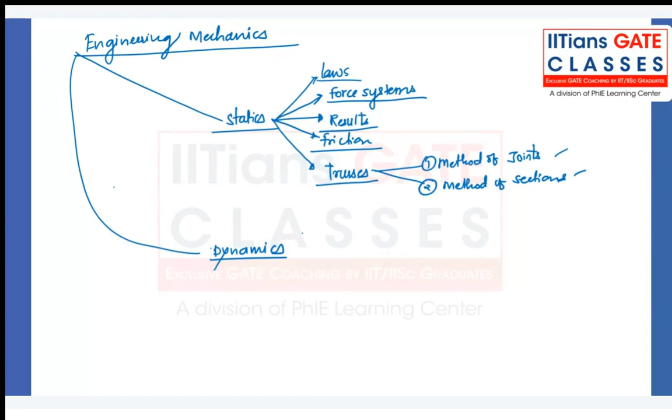Basically, if a truss is smaller, a single truss or two trusses, then maybe we can go for joints. But if a larger truss structure is there, and they are asking for a force in a member which is, let's say, at the center of it, then if we use the method of joints it will be time consuming. So in that case, we can go for the method of sections.

And the last topic which we studied in statics was the principle of virtual work. We studied it at the end, but it is mainly related to the statics part because the body is in equilibrium and we assume a virtual displacement, and the work done by the virtual displacement we called virtual work. And the principle of virtual work states that the sum of all the virtual work is zero for any virtual displacement, assuming we have calculated the forces and moments.

But you already know that we can do the same by equations of equilibrium as well. We don't need the virtual work principle exclusively, so it's not a compulsory topic. And that's all we studied in the statics part, and we have solved problems on each and every topic.

In dynamics, as you know, I gave initially a brief introduction about Newton's laws - the first law, second law, and third law. Also how the equations of motion will look like, and how we can derive them.

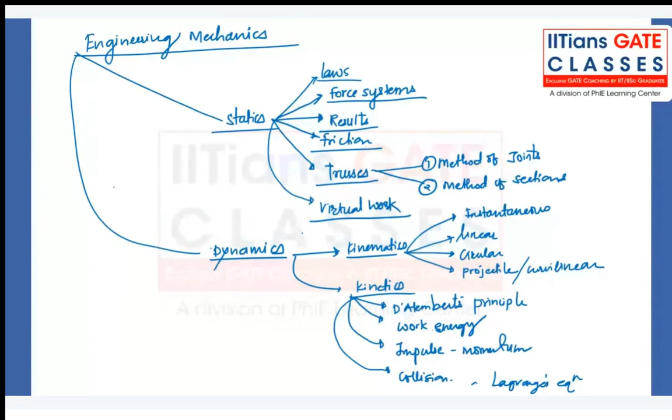I have also given you an introduction to the polar form when we studied kinematics. We also solved problems not just in linear but also in the polar coordinate system, and the same equations we use here apply in the polar form. We solved some problems in that coordinate system as well.

Keep revising the subject regularly after a few months, since you have a huge gap of close to 10-11 months before the exam. You should revise it regularly, maybe after 3-4 months, just to stay in touch with the subject.

Continue solving questions. What I'll do is I have collected some questions which we'll solve today, and I'll also send you some questions regularly through the WhatsApp group. That's the process we will follow.

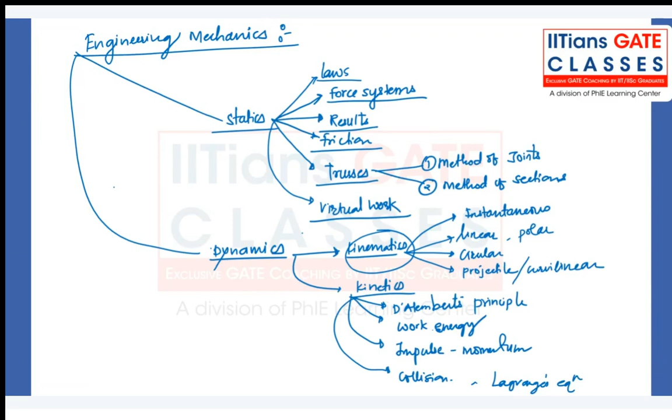So let's start with some questions. I have brought some questions from the statics part, because it's been a while since we studied statics, and we have studied dynamics questions comparatively a lot. So it would make more sense to focus first on the statics questions.

Okay, I'll expect quick answers here, since you are already aware of this topic. Little bit tricky questions I am putting. At least 2 to 3 questions will be tricky. So let's start with them.

What I want is you should be able to draw the free body diagrams correctly. If you are able to do it, then the problem is very easy. Compute the force F.

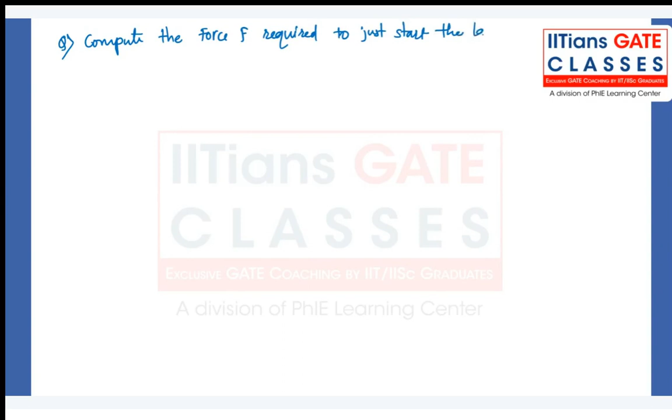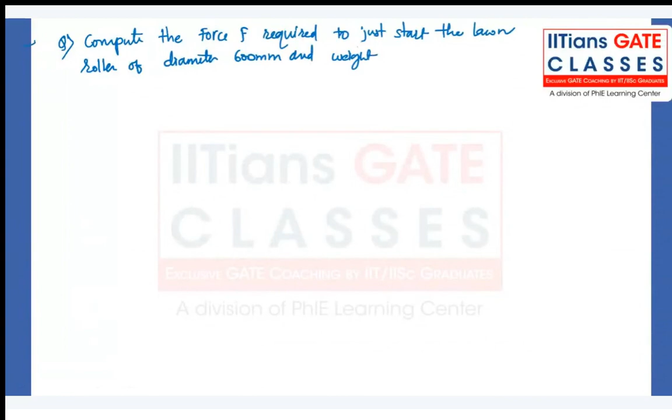Required to just start the lawn roller of diameter 600 mm and weight is equal to 1 kilonewton over a 75 millimeter step, when the roller is pushed as shown in figure. So this is the first part of the question.

Second part of the question is the magnitude and direction of reaction of the step on the roller. Okay, so quite interesting question.

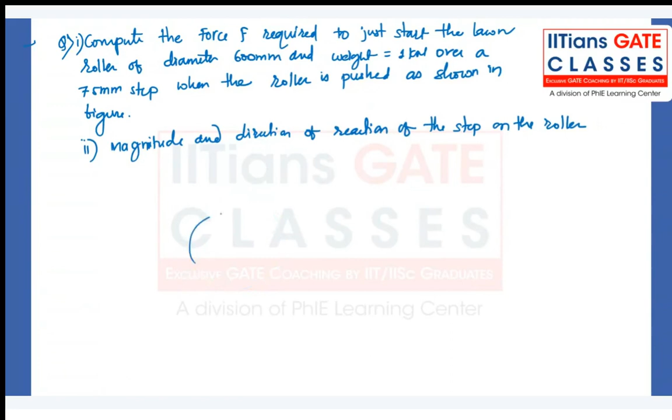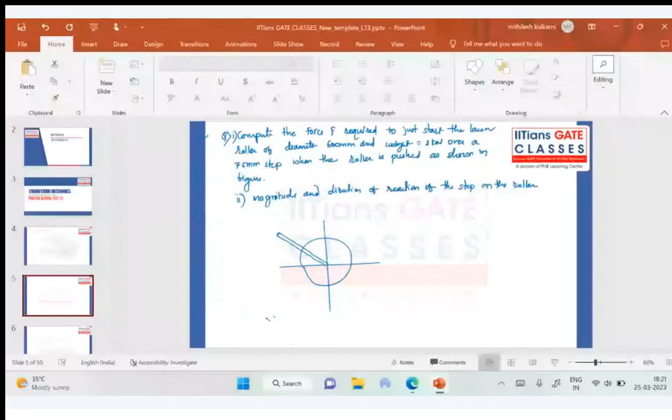Assume this as the roller. This is the handle of the roller. We are applying a force F, which is at 30 degree with the horizontal, and the diameter is 600 mm. The radius is 300 mm. So total diameter is 600 mm. And it is on the step.

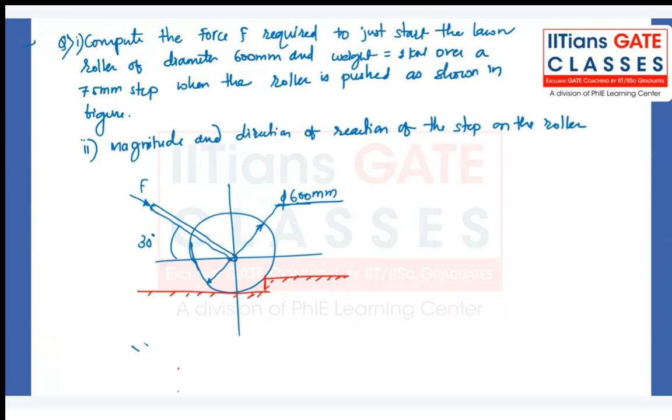So the step is 75 mm. 75 mm step. And we don't know at certain angle, let's say it is connected here.

So yeah, I think other things you should be able to do it. I'll not give more hints here. That is all given in the question. Weight of the block is W, that is 1 kilonewton. Weight of the roller, sorry. You can call this point as A, and you can call this point as B.

So I'll give you 2 minutes of time, and you come back with your answers. Though it looks complicated, it is not that complicated. If you think it correctly with the approach of solving using the equations of equilibrium, you should be able to solve it easily.

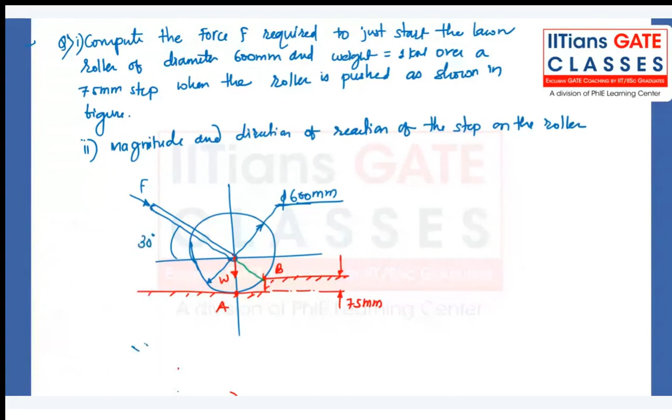So if you think this height is 225, since the total height of the center from ground is 300 minus, we have to subtract the 75 from it to get this 225 mm. So we know this height, we know the radius of the roller, so you can calculate the alpha angle. What is sine of alpha? So let's call this point as D. Sine of alpha is equal to BD by BC, where C is the center. So it is 225 divided by 300.

No, Abhishek, 6 Newton looks very less, it's not correct. So you will get around 0.75. So alpha is sine inverse of 0.75, and that is 48.59 degrees. Okay, so this is the alpha angle.

So if I draw now the free body diagram of that joint at point B, look at it, how it will look like. We have the point B like this, and at point B, what are the things? We have certain force F. Oh no, this is not point B, we'll start at point C first, and then we'll come to point B if required. So at point C, we have the force which is acting at an angle 30 degree. We have self weight of the roller, which is W, that is 1 kilonewton. Let's call it F, and then

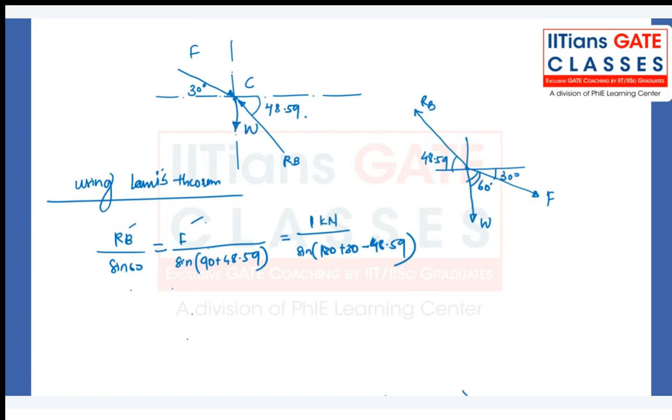Think on it. What is unknown here? We either have to calculate RB or F, or W is known. So W is how much? 1 kilonewton. So yeah, then you don't need anything else. By using this relation, you can also calculate F and RB.

How will F look like? F will be equal to 1 into sine of 90 plus 48.59 divided by sine of 180 degree plus 30, or let's calculate it. You should get 210 minus 48.59. Calculate using calci, should get 2.075 kilonewton.

And what about the RB? It is 1 into sine of 60 divided by sine of 210 minus 48.59. So it's 0.866 divided by 0.319, close to 2.72 kilonewton.

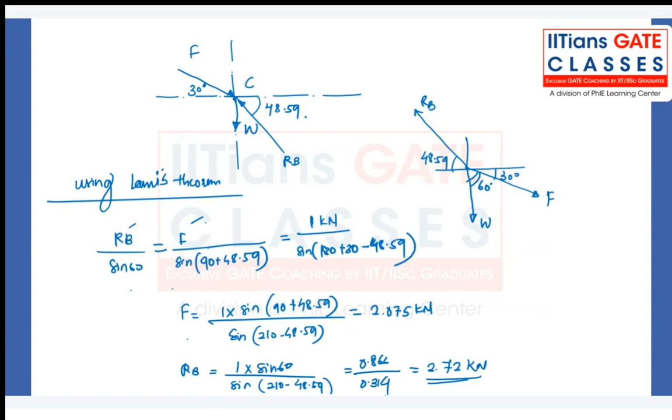Is it clear, Abhishek? Are you following? Any doubt? Because none of you has answered this question. It's not that difficult. You should be able to at least draw this free body diagram, and then I'm doing nothing here, just applying Lami's theorem to solve it. If you don't want to use Lami's theorem, you can also use the equations of equilibrium and solve it. Are you following? Any doubt?

See, don't just get afraid if a question comes like this, and not in the form of a force system. It is actually indirectly given in the form of a force system. So you should apply your basic understanding to check how can I convert this problem to the force system.

Yes, Ganesh, I'll explain you once again. Okay, let's...

So if you are taking moments about B, then actually it is becoming very difficult to solve, Abhishek, because you don't know the perpendicular distance between the line of action of the force F and the point B, and it's difficult to calculate, right?

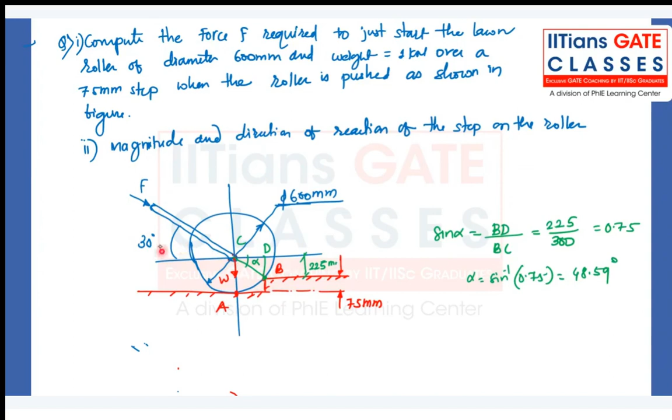And that is not along the line of action of the 30-degree force. So the 30-degree force, Abhishek, will create a moment, but you have to again draw the line of action and calculate the perpendicular distance, and make the calculation, which is time consuming. But if you know the angle, if you know the reaction, the best way is to know that you have a force or reaction at angle 48.59 passing through the origin or the center, and we already have two forces which are passing through center.

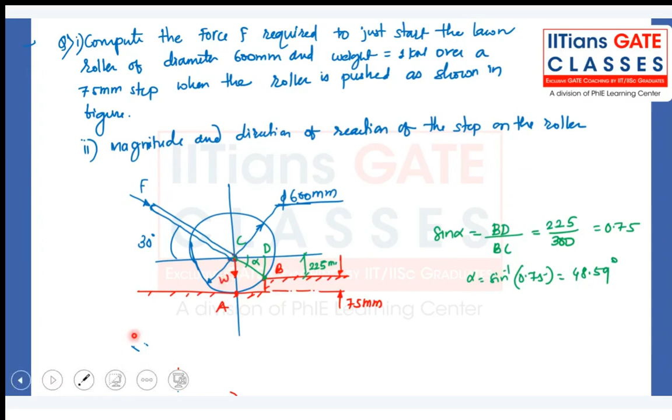So the force system will look something like this. One force which is applied by the user on the roller. The weight is the weight of the roller, and RB is a reaction by the step.

I have redrawn this figure by using the principle of transmissibility of force. So RB I can draw from here, F I can draw from here, and W as it is. Now I use Lami's theorem to solve it. RB we have calculated, that is the reaction because of the step, and F also we have calculated, that is the force we have to apply in order to start moving this roller. Ganesh, is it clear?

Okay, problems are simple. Just you have to convert it into a free body diagram correctly. I'll give one more question, little bit tricky again. I would expect you should be able to deal with this question easily.

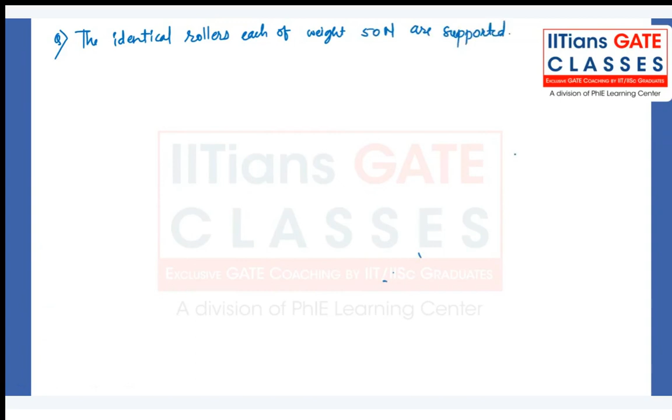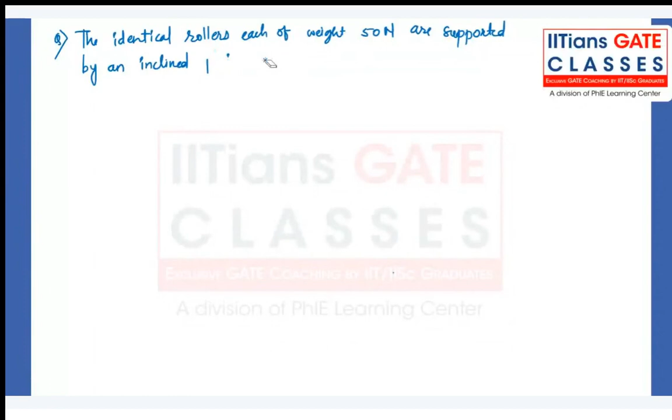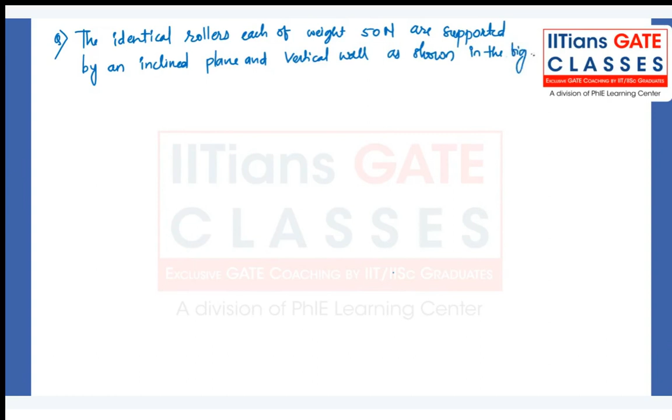The identical rollers, each of 50 Newton, are supported by an inclined plane and a vertical wall, as shown in the figure. Find the reactions at the points of support A, B and C. Assume all surfaces to be smooth, so you don't consider friction here.

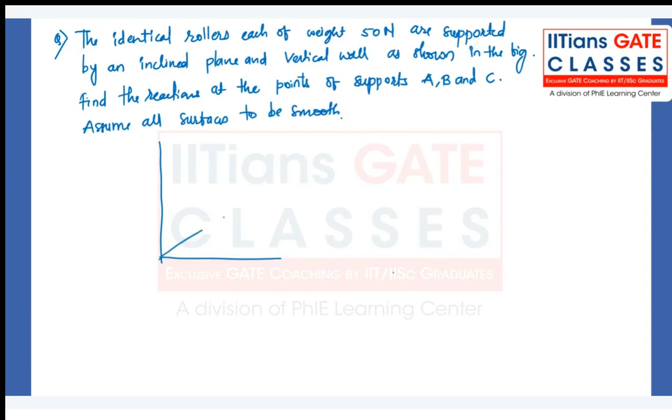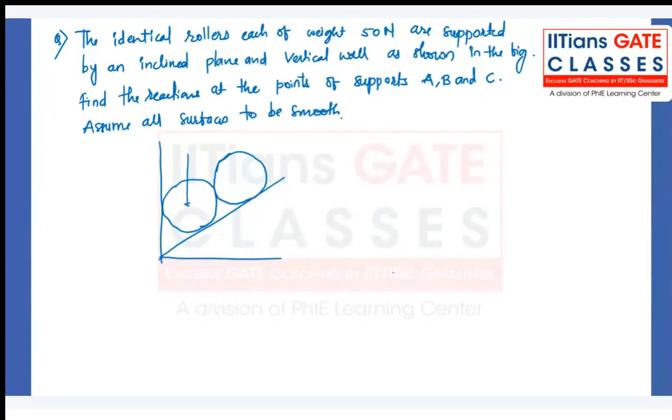Let me draw the diagram. Two rollers are there of weight 50 Newton, identical rollers, supported by a vertical wall and an inclined plane. This is the vertical wall, and this is the inclined plane. This is point B, this is point A, and this is point C. This angle of inclination is 30 degrees. So solve this question, you can take this point as point D.

Solve this question. First of all, think how the force system will look like. Try to solve it in a smart way. Draw the free body diagrams, and then calculate these reactions at support A, B, and C. I'll wait for 2-3 more minutes, and you solve this question.

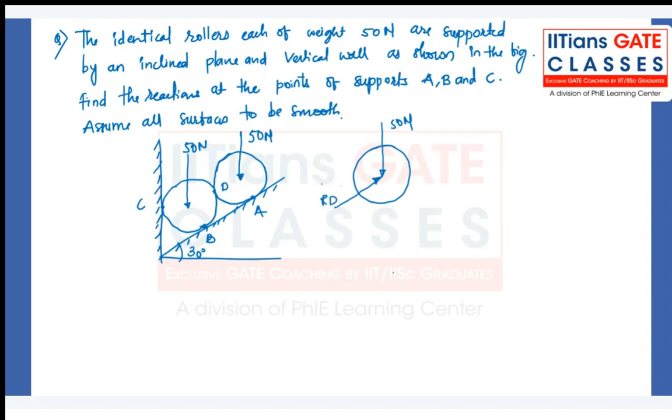So let's start with the free body diagrams of the rollers. First roller looks like this, we have a 50 Newton force acting like this. Then we have the second roller. Because we have less forces here, we'll start with the second roller. We have A and RD only, RD and RA.

You have to find the angles, that is the main point here. If the angle between two lines is 30 degrees, then the angle between their perpendiculars also has to be 30 degrees. So considering that this angle has to be 30 degrees, this has to be 60 degrees. Similarly, these two lines should also create a 30-degree angle with horizontal, so RD should make a 30-degree angle with horizontal, so this angle has to be 60 degrees. And here we have 90 degrees, and here we have 90 degrees.

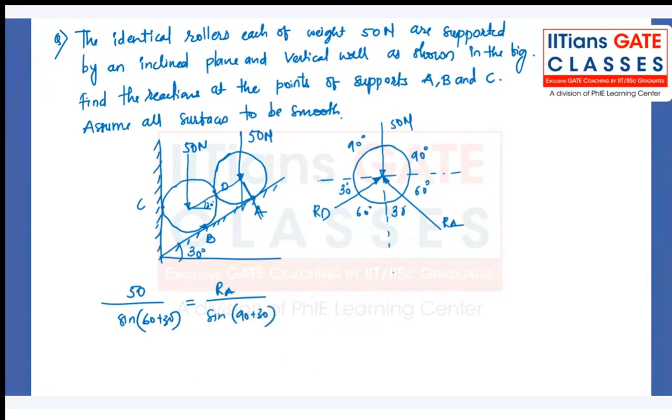So this is RD and this is RA. Now if I use Lami's theorem here: 50 divided by sine of 90, because sine 60 plus 30 is 90 and sine 90 is 1, that is equal to RA divided by sine of 90 plus 30. Sine 90 degree plus theta is cos of theta, or sine 120 you can directly calculate using calculator. That is equal to RD divided by sine of 90 plus 60 degree.

So from this you can easily calculate RA and RD. This is 1 anyway, so it is very easy to calculate RA. RA is equal to 50 sine of 120, so it is 50 into 0.866, so it is 43.3 Newton. Abhishek, yes, RA is correct. Ganesh, so RC is not equal to 43, so check your answer.

What about RD? RD also you can calculate. RD is equal to 50 into sine of 150, and that is 0.5. Sine 90 degree plus theta is cos theta, and cos 60 is 1 by 2. You can say 25 Newton.

So we got RA from here. But RB and RC, if you want to calculate, you just have to create one more free body diagram for the first roller. From this, what we have calculated is RD, and that will help us there. So you can either draw the free body diagram of the whole system, or you can also draw the free body diagram of the structure.

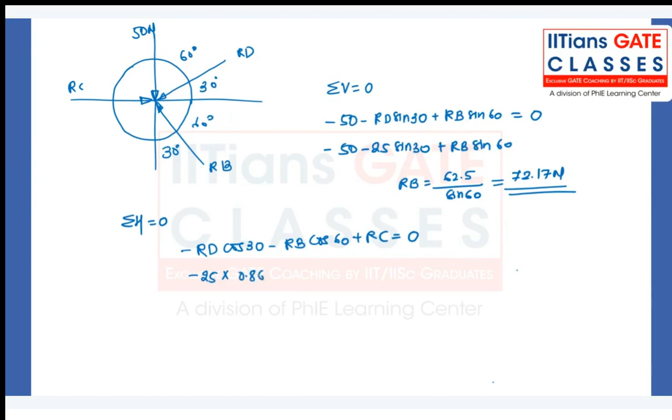RD is 25, minus 25 into cos 30 is 0.866, minus RB which we just calculated 72.17 into 0.5, plus RC equal to 0. So from this you can calculate RC, which is 57.735 Newton.

Abhishek, yes. RC and RB, you understood. Srijana, looks like some, Sonu, you guys have answered it incorrectly. Now is it clear to you all?

Once the main problem, 80% of the problem is solved once you are able to draw the free-body diagram. After that, there is nothing, it is just mathematics. I'm not doing anything after drawing the free-body diagram. It is just summation of all the forces in horizontal direction, vertical direction equal to 0. And in this case, I applied Lami's theorem, that is the same thing, nothing different.

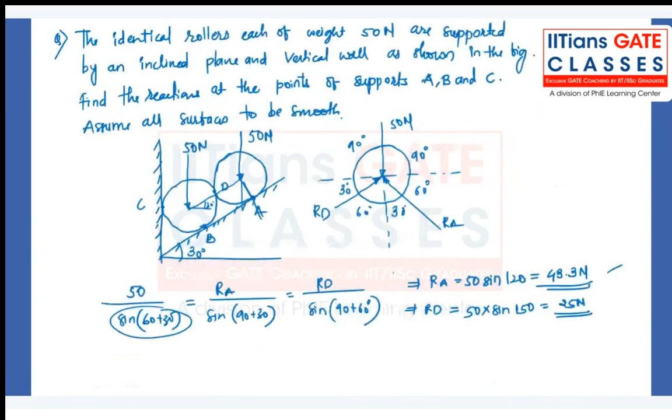One more interesting question I'll give. These are good questions to build your thinking on creating free body diagrams, because statics problems can be solved if you are able to draw the free body diagram. So you should think of a variety of problems. You should be able to easily tell at what angle RD and RA will come here, at what angle RB and RD will come. Just by looking into the figure, you should be able to directly draw it and solve it easily. It comes with solving problems, otherwise it will take some time, and ultimately you will be able to solve it, but it will take time. Keep practicing.

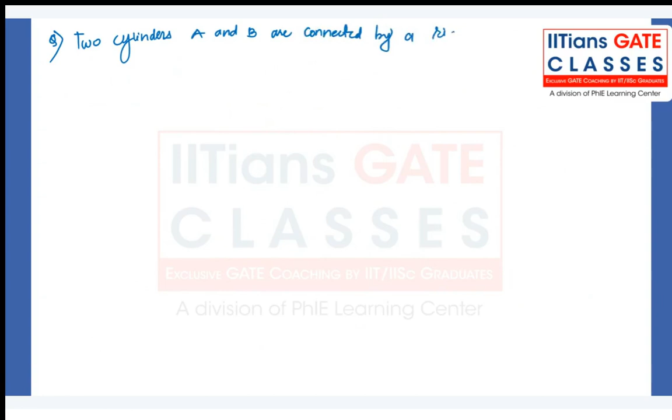Let's take one more question. Two cylinders, A and B, again an interesting question, are connected by a rigid bar of negligible weight, hinged at each cylinder, as shown in the figure. Determine the magnitude of force P required to keep the system in equilibrium. That is the only question.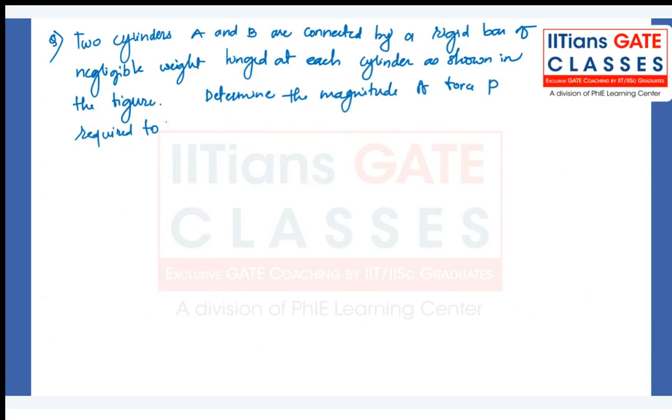Determine the magnitude of force P required to keep the system in equilibrium. These days a lot of questions are coming without options.

If you don't have practice solving problems, there is a chance you can make a silly mistake. If you have options and you are unable to achieve any of the four, you know you are doing something wrong. But if they give a question where you have to type the answer, there is no way to trace your mistake. If you make a small mistake, it can affect it. So I would suggest you focus more on practice now, so that as you solve more questions, your tendency to make mistakes will reduce and accuracy will increase. That is the main thing.

So we have two cylinders. One cylinder is kept on a 60-degree inclined plane, and another cylinder is kept somewhere here.

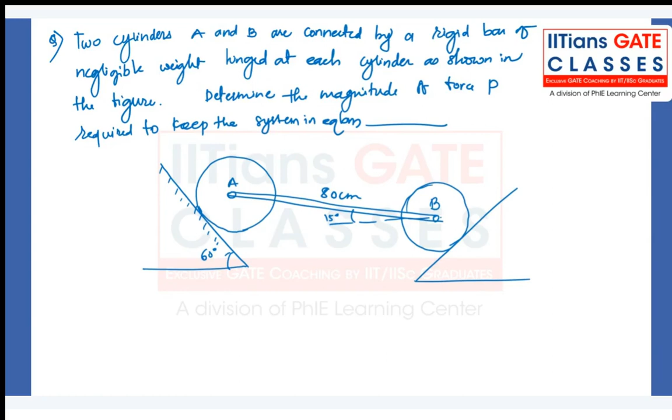So I'll show you how force P looks. Force P is making an angle of 70 degrees with the vertical. This is already given in the question. You have to calculate the magnitude of force P.

WA is the weight of the cylinders A and B. WA is 600 Newton. WB is 400 Newton. Angle is 15 degrees - this angle is 15 degrees, and this is 70 degrees here. Here this angle is 45. That is why the difference of 15 is coming.

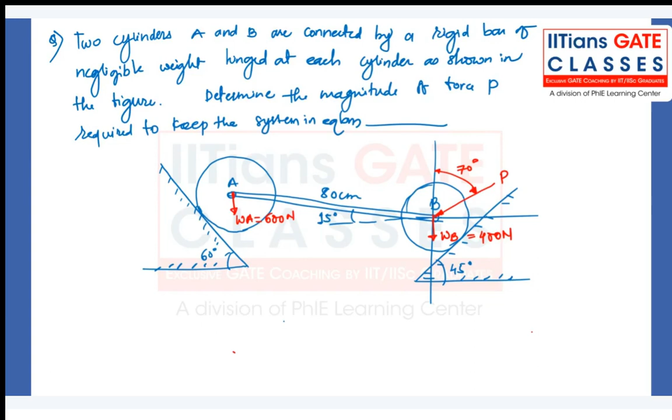I hope it is clear. More or less I have already given you all the things, so you should be able to solve it now. I'll wait for a couple of minutes. You solve it and send me the answer.

So these questions are not traditional exam questions, but they are very good questions. It will build your understanding of drawing the free body diagram. Some of them are from previous years, but not all of them. If you are able to solve this, it means you are good at drawing the free body diagram, and if a question like this comes, you should be able to handle it. You will get easier questions than this, but this will bring knowledge to you.

Yes, whenever we are supporting, obviously the reaction will come because weight is acting on that inclined surface at 60 degrees and 45 degrees. Obviously some reaction will come out of there, so you have to consider the reactions from the support.

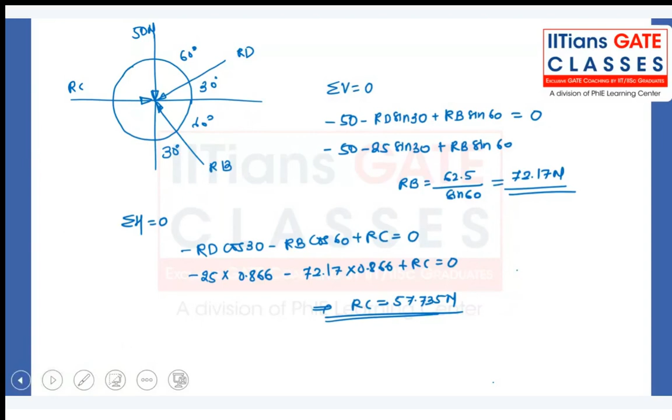Okay, let's solve it. First of all, draw the free body diagram of this left hand side cylinder, which is at an angle of 60 degrees. You can parallelly solve if you are already solving it, and share your answers in the chat group.

So we have one force which is at an angle of 60 degrees, because the angle between the perpendiculars has to be equal to the angle between the two lines, which is 60, so the perpendicular has to be 60. And we have an FBA, let's call it FAB, and that is at 15 degrees here. So this has to be 75 degrees. I hope this free body diagram is clear to everyone.

This you can call as RA. So RA divided by sine of 105 is equal to W divided by sine of 60 plus 75, that is equal to FAB divided by sine of 120. So this will give you the FAB value, because W you know, that is 600.

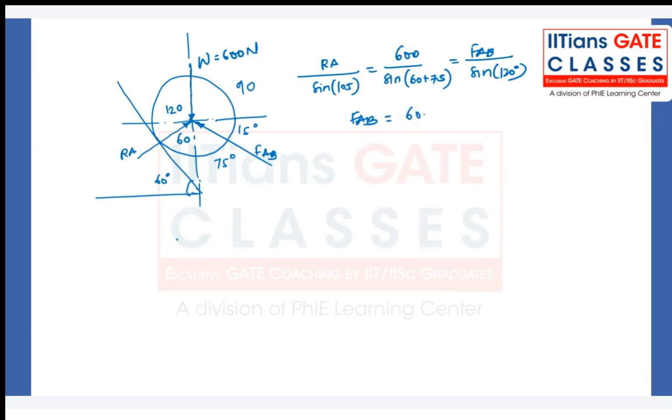I'll directly write here 600 Newton. FAB will be equal to 600 sine 120 divided by sine of 135, and that will be 734.85 Newton. We are not interested in RA and all, because we need FBA - if you draw the free body diagram of the second roller, you need FBA there. That is the only reason I calculated FBA, so I will not waste time calculating RA here.

So we have a 45-degree angle, we have the RB. This is also 45. P is acting at 70 degrees, so this is 30 degrees. Weight is acting in the downward direction, W. Calculate here, because we cannot apply it - let's do it here only, to make it easier. W is equal to 400 Newton.

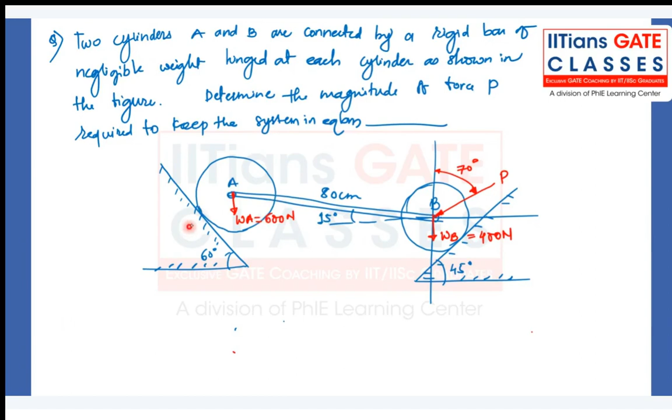So in order to remove one unknown, you first draw the free body diagram of this roller A, and then calculate FBA, because here the only unknowns are FBA and RA. Here also you can create two equations, or by using Lamy's theorem you can easily get FBA. If you don't want to use that, using summation of horizontal forces and vertical forces equal to 0 is also correct; you will get FBA using that logic as well. So now you know FBA.

Now the unknowns are only two, that is P and RB, and we have two equations coming from summation of horizontal forces equal to 0 and summation of all vertical forces equal to 0. Using these two equations you will get the value of P. Is it clear, Surjana? Yeah, okay.

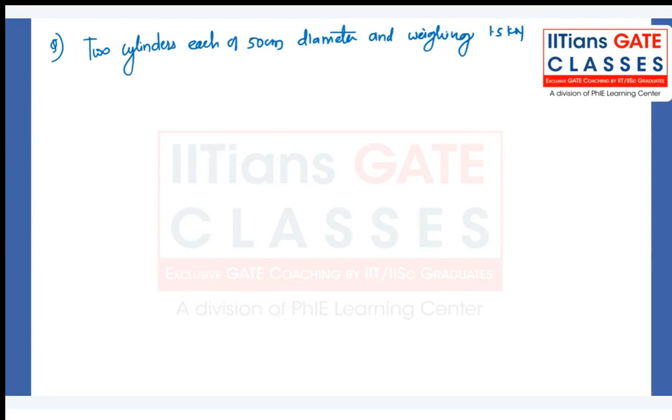Two cylinders, each of 50 centimeter diameter and weighing 1.5 kilonewton, rest on a smooth horizontal surface. They are connected by a wire rope at their centers, of length 60 centimeter. A third cylinder of 80 centimeter diameter, weighing 2 kilonewton, rests on the lower cylinders. Find the tension in the wire and the pressure, or reaction, between the contacting surfaces in kilonewton. The answer should be in kilonewton for both, one is tension and one is pressure.

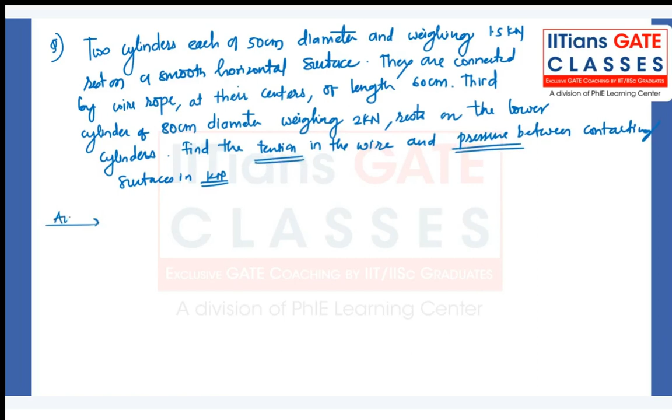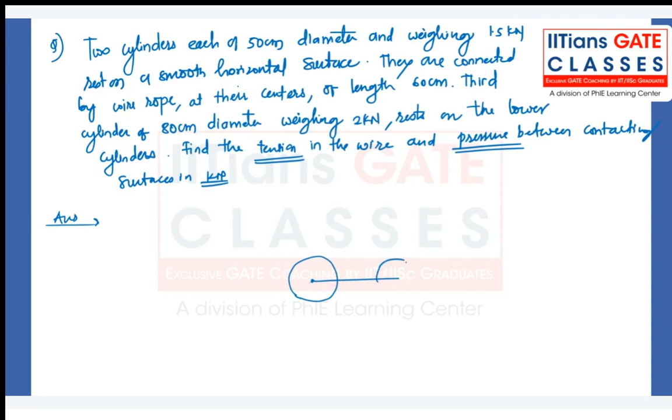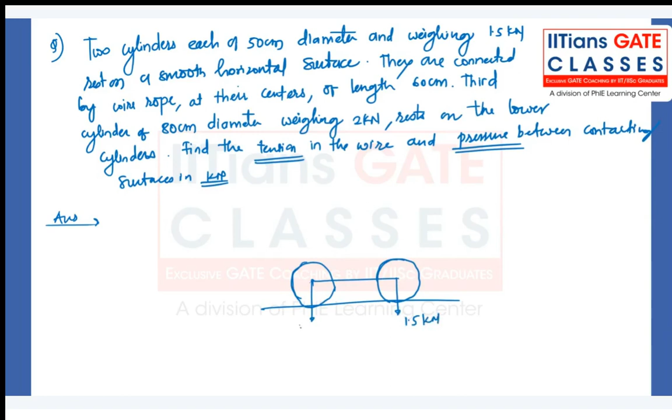Let me help you out with the diagram. So two cylinders, these are the two identical cylinders of 50 centimeter diameter, and weight is 1.5 kilonewton. Then we have this big roller, of 80 centimeter diameter, and weight is 2 kilonewton, and they are connected by using wires, this is 60 centimeter. Okay, I hope it is clear now.

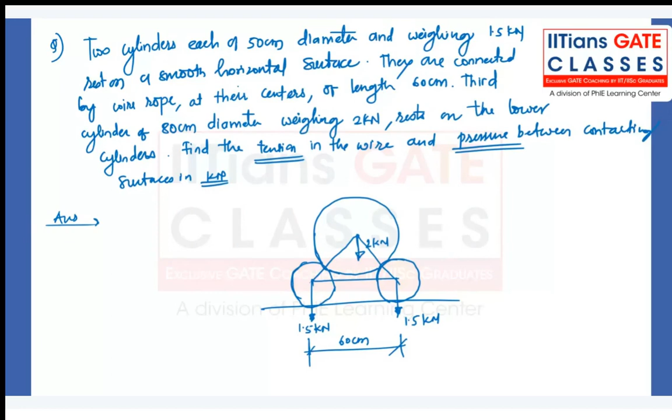So the wire is connected only here. Listen carefully, this is the only part where the wire is connected, and here I'm drawing the center lines. The red portion is wire. I'll repeat the question if it's not clear to you.

Two cylinders, each of 50 centimeter diameter, weighing 1.5 kilonewton, rest on a smooth horizontal surface, and they are connected by a wire rope at their centers of length 60 centimeter. The third cylinder, 80 centimeter diameter, weighing 2 kilonewton, rests on the lower cylinders as shown in this figure. Find the tension in the wire and the pressure between the contacting cylinders.

So draw the free body diagram and solve it. The main task here is to draw the free body diagram. If you are able to draw the free body diagram, then there is nothing else to solve. It is very, very easy.

After this, we have to solve a couple of questions on friction as well. So do it fast.

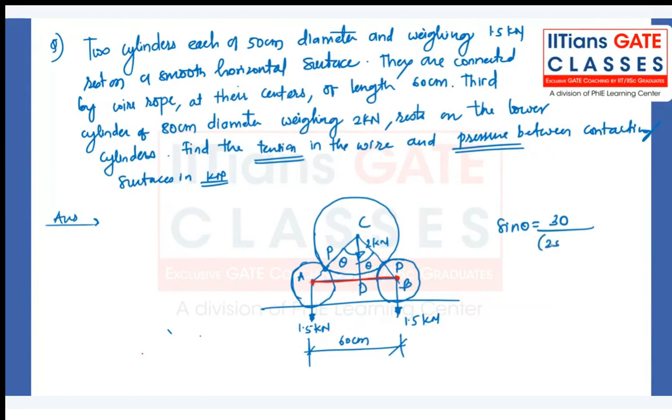So what is theta? This is theta, and this is also theta on the right hand side because it's a symmetric figure. So you can calculate theta by: what is sine theta? Sine theta is equal to perpendicular divided by hypotenuse. Perpendicular is 30, hypotenuse is sum of the radius of the two cylinders, 25 and 40, right? So theta is equal to sine inverse of 30 by 65, which is 0.462. You will get theta equal to 27.49 degrees.

So you got the theta value, so you know at what angle these are acting. Let's call it 27.49, and this is also 27.49. You can also draw the free body diagram like this. WB, 27.49 - you can remove this if you want. And here also you can draw it like this, P, and this is 27.49.

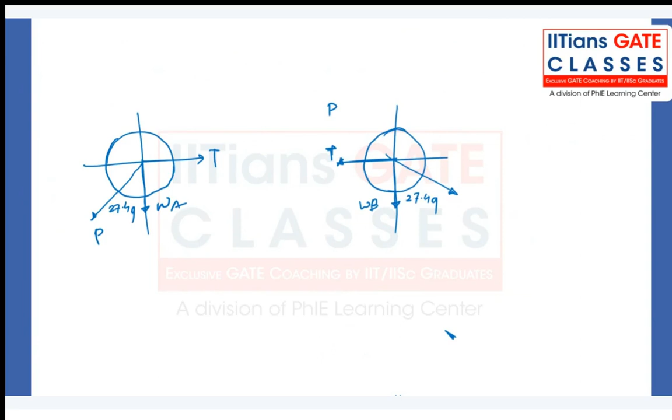And now you can apply Lami's theorem. P divided by sine of... how much? Let's keep it as it is, maybe as of now it is not needed.

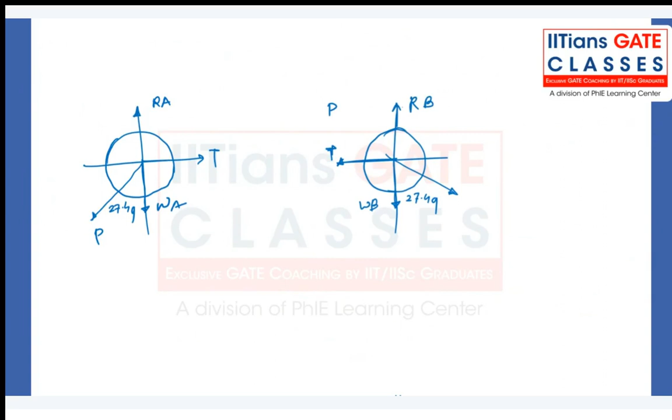Anything missing here? Yeah, I think two things we have missed as of now, that is reactions. Let me check. Yes, Srujana, I forgot to draw the reactions, thank you for reminding. RA and RB. We don't know the values of RA and RB also, but obviously it's a symmetric figure, so the value of RA and RB we expect to be the same. So R, the reaction, will be equal to total weight divided by 2.

What is the total weight of the system? 1.5 plus 1.5 plus 2, correct? 2 is the weight of the bigger block, so divided by 2, so it is 2.5 kilonewton, and that is upward. RA equal to RB equal to R. Is it clear?

Yes, 1.12 is the correct answer, Abhishek, for P, and tension in the rope looks incorrect. Okay, what is your doubt, Abhishek? What didn't you understand here? How are you asking?

What is your doubt? See, 2 kilonewton is the weight of the bigger block, right? And 1.5 and 1.5 kilonewton is the weight of these two blocks. So total, how much weight are we applying on the ground? Total, we are applying 1.5 plus 1.5, that is 3, plus 2, that is total 5 we are applying on the block, okay, let's say.

And how many reactions do we have? We have two reactions and they are symmetric, right? So total weight downward is, let's say, 5 kilonewton. So the two upward reactions, which is a symmetric figure, should be half of the 5, so that is 2.5. That is why it is calculated like this.

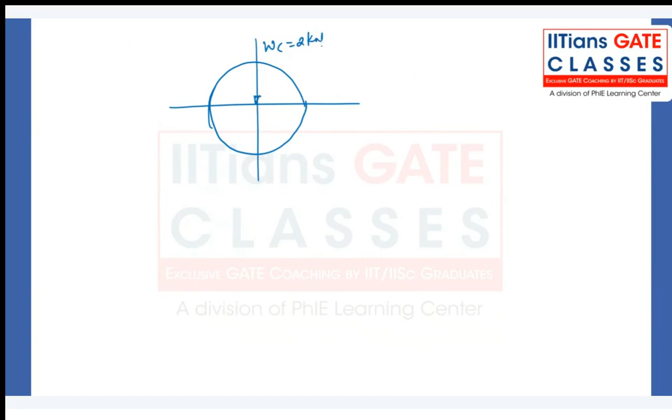Yes, okay. So you can draw the free body diagram of the bigger block, the bigger cylinder, as well. The bigger cylinder, how the free body diagram will look like is this. We have weight which is acting downward, 2 kilonewton. We have force P, and you have one more force P. And the angle also you know, which is this theta angle.

We have already calculated this, okay, so you can directly apply Lami's theorem: P divided by sine of 180 degree minus theta, that is, sine theta itself, and that is equal to WC divided by sine of 2 theta. So P you can calculate from here.

P is 2 into sine theta divided by sine of 2 theta. That is equal to 2 into 0.462 divided by 0.819, and that is 1.128 kilonewton. So P is correct, Abhishek, you have calculated correctly.

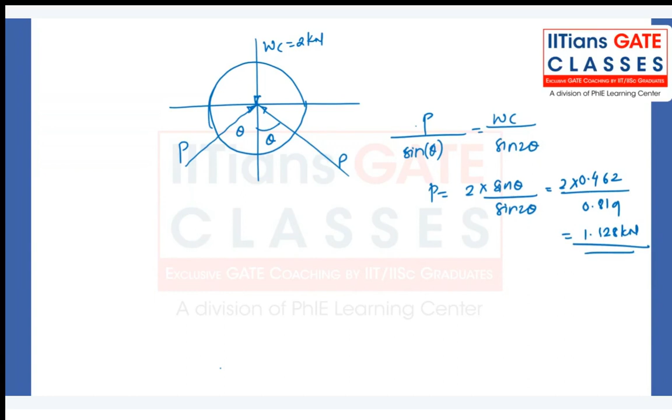About the tension, yeah, you can use any of this free body diagram and calculate the tension. So what will be the tension? Tension will be equal to the sine component of P. So that is P sine of 27.49.

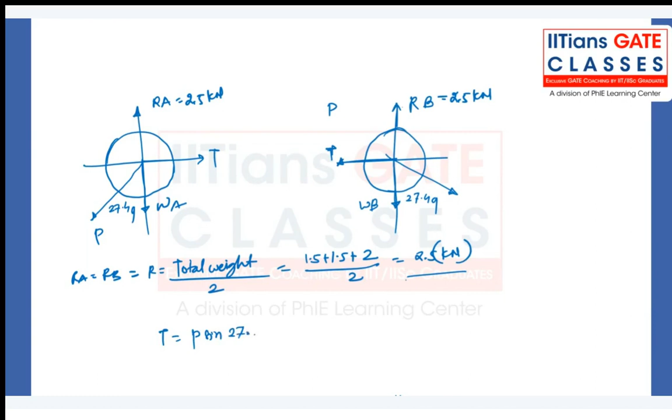And that is equal to 1.128 into sine of 27.49. We already know this number, sine of 27.49 is 0.462, and that is 0.52 kilonewton. Okay, so the tension in the rope is 0.52.

Vaibhav, are you following? Punya? Okay, so I hope it is clear to you all. If you have 0.68, what is that?

No. Let me just check the calculation. Others, is it correct or wrong? 0.52 is correct, Sujana.

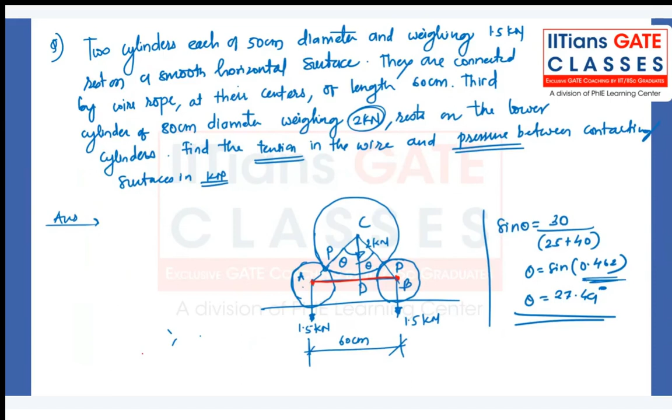You just multiply this, right? So you know this sine of theta was equal to 0.462. So sine of 27.49 is 0.462. That is what I have used, and P we just calculated. So just check your P. If it is correct, then the answer should be 0.52.

Okay, Abhishek, 0.516, yeah, more or less very close to 0.52. It's not a problem.

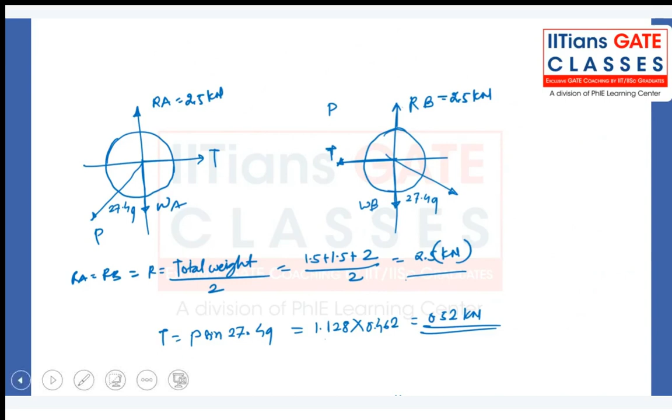Okay, so I hope it is clear to you. Some questions I'll send you on WhatsApp, okay, in which you have to apply a similar approach. Let's solve one or two questions from the friction topic, as we have some more time.

Okay, so this is the question. A block of weight 6 kilonewton, and the coefficient of friction between the table and the block is, so block A is here, which is 6 kilonewton. Coefficient of friction is here 0.25. Find the maximum weight of block B. So here weight you have to find, WB, WA.

What they are asking first is WB. And the second question is also determine tension in the cable. So there are like two tensions, you have to calculate it.

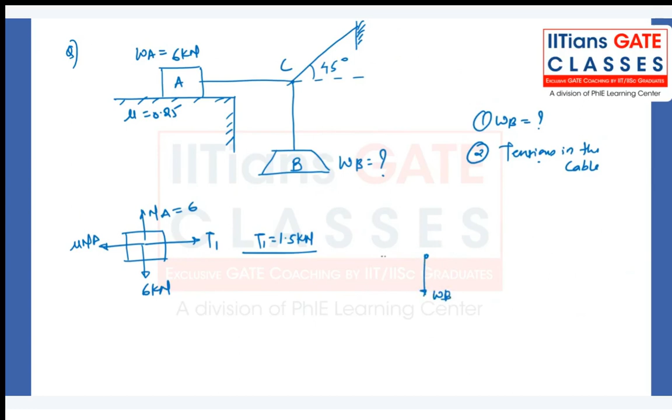Let's draw the free body diagram of this joint, you can call it joint C. We have WB acting downward. We have tension 1 acting this side, and tension 2 acting this side, making an angle of 45. So using Lami's theorem, WB divided by sine of 135 is equal to T1

divided by sine of how much? 90 plus 45, again 135, that is equal to T2 by 90. So T1 we have just calculated, that is 1.5. And from this you should be able to calculate WB. WB is equal to 1.5 because 135 will get cancelled, and T2 will be equal to 2.12 kilonewton.

Clear? Any doubt? Okay, good. Yeah, WB is clear. You can just cancel it out, and WB is equal to 1.5 as it is. Okay, so it's good, most of you have solved it.

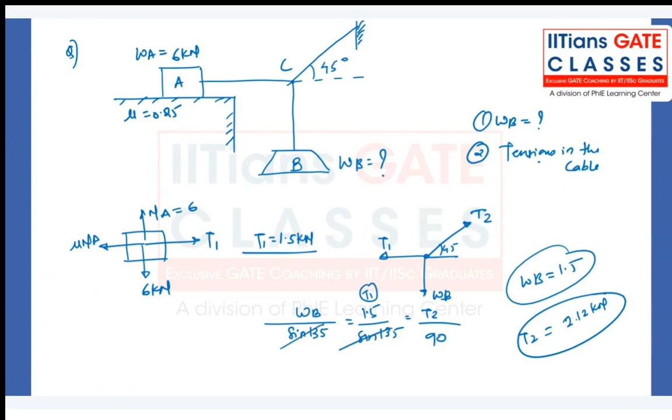Next question. Okay, we have a figure like this. We have one block, block B. We have another block, block A. It's attached like this.

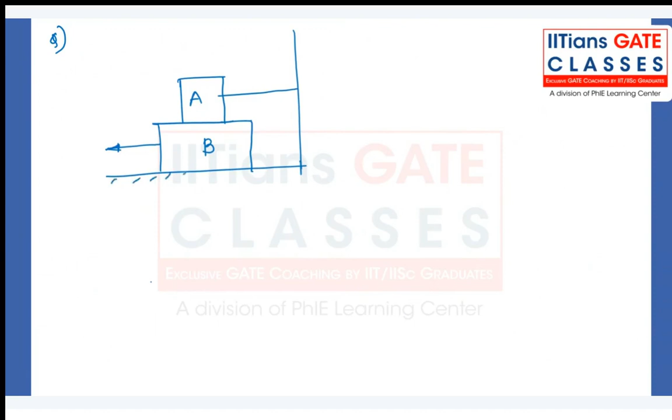Okay, so I'll read the question. The two blocks A and B, weight of block A is 100 Newton and weight of block B is 150 Newton respectively. Find the smallest value of force F required to move the block, required to start moving the block.

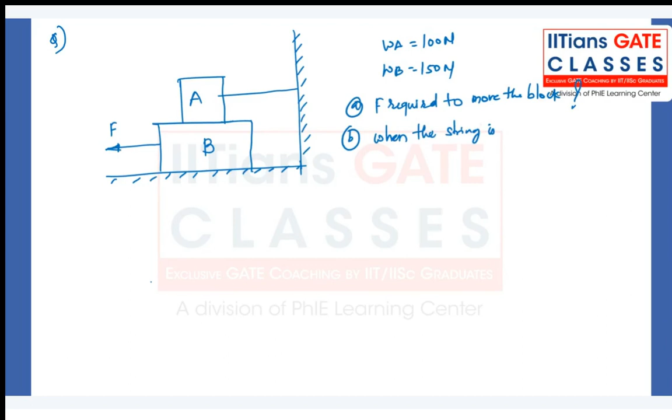Second question: when the string is removed, okay, this string, you can see the block, we are attaching one string to this. When the string is removed... In both situations you have to find it: when string is there and when string is removed. So this is the B situation, A situation is when the string is there. Coefficient of friction between the floor and the block is 0.25, and between the two blocks is 0.2.

I'll repeat it once again. Listen carefully. Two blocks A and B. Block A is 100 Newton, block B is 150 Newton respectively, and what they're asking is the smallest force F required to move the block. In the first situation, when the string is there, and second situation, when string is removed. The coefficient of friction is 0.25 between the floor and block B, and between the two blocks the coefficient of friction is 0.2. The data is given to you, make use of it and solve the question.

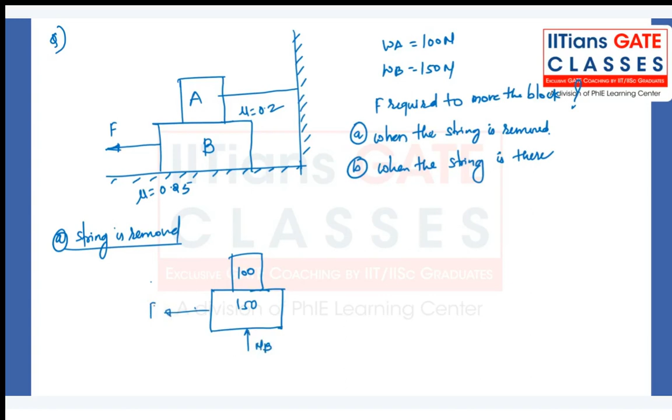So let's say A is string removed and B is string present, start with A, string is removed. When string is removed, the problem is easy because you can assume it as an entire system, like this. This is 100, this is 150, NB, and the frictional force and the force F is applied here. Frictional force is here, mu B times NB. So in this case, summation of forces in Y is 0. So NB will be directly 250 Newton. And the summation of all forces in x direction, if you set to 0, then the force is equal to only the frictional force, that is 0.25 times NB, that is 250, which is 62.5 Newton.

So when string is removed, the problem is simpler, you can assume the entire system as one, and when you pull the below block, the whole system will be pulled automatically. When you put the string, obviously you have to apply more force, because you will have a frictional force on the top surface as well, coming from block A.

Yes Abhishek, your answer is correct, 82.5 is the correct answer. So in that case, you may have to draw the two free body diagrams. Let's start with body A, since the string is present. This situation now we are studying, so we have body A.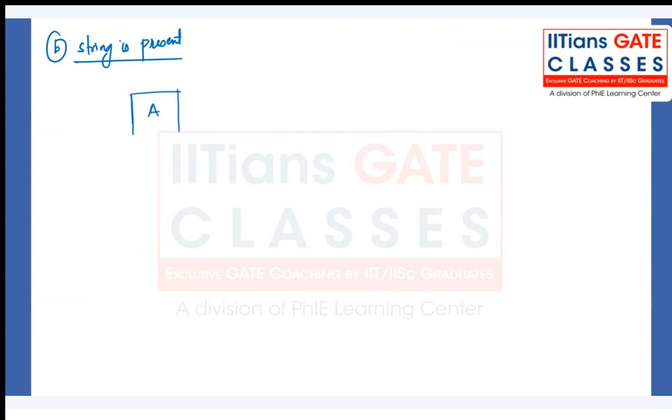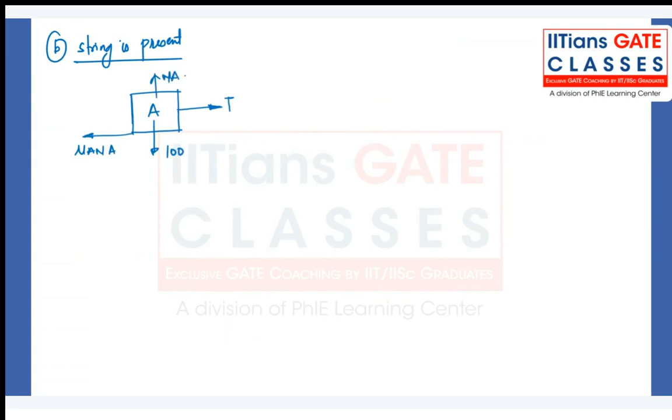Tension is applied to the body. We have mu A NA. We have weight of the body 100, and we have Na, force acting upward.

Here Na is equal to 100 Newton. You can also write tension will be equal to 0.2 times 100, that is 20 Newton. This is from the first figure.

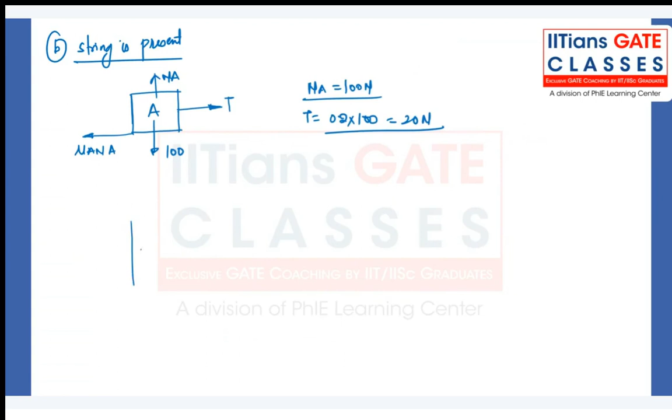From the second figure, block B, you have one Na force here. You also have the weight W downward, but you have one upward force, that is Na I will write here, and NB I will write here. This is how it will look like.

And then we have mu B NB forces here, mu B NB, and here forces in this direction, that is mu A NA. Is it clear, the free body diagram?

If it is clear, then let's draw summation of all y equal to 0. So W here is 150. So NB is equal to 150 plus Na, that is 150 plus 100, that is equal to 250. So NB is equal to 250 Newton.

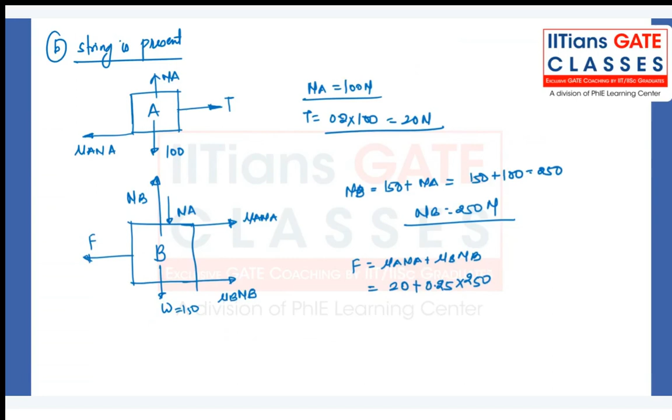Now the summation of all x forces equal to 0, so F is equal to mu A NA plus mu B NB. Mu A NA we already calculated, that is 0.2 into 100, that is 20. Mu B we already know, that is 0.25, and NB is 250 we calculated, so it is 62.5, plus 20 is 82.5 Newton.

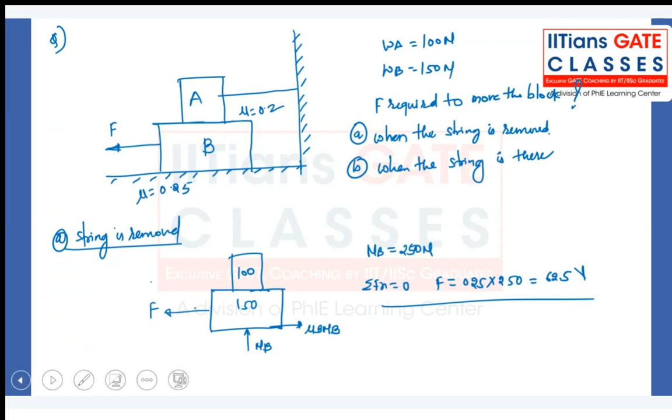So practically also, if you think, whenever we have a string, obviously we'll have one restriction to the movement of block B because of the friction between these two blocks, and it will indirectly make you pull block B with more force compared to if you remove the string. I hope the question is clear to you. We have solved similar questions before.

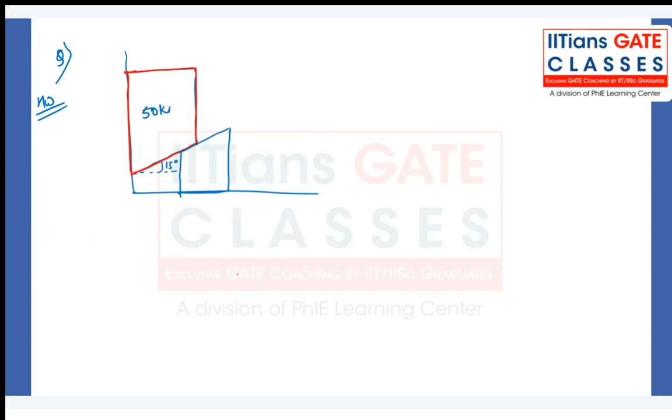Okay, we have these two blocks. I hope you understand the figure now. We have a 50 kilonewton block and a 5 kilonewton block. They are placed like this, and we are applying force P here. Angle is given, which is 15 degrees.

The question here is, the block of weight 50 kilonewton is kept in equilibrium by a wedge shown in this figure. If the coefficient of friction is 0.2 for all contacting surfaces, the wedge has weight 5 kilonewton, as shown in the figure. Determine force P necessary to cause a tendency of the block to move up.

So how much force P do we have to apply in order to just start moving the block upward? P is what they are asking. Mu is given as 0.2 for all contacting surfaces. This is your homework question. You try it, and if you face difficulty, feel free to reach out to me. The answer here is 39.53 kilonewton.

If you draw the free body diagram, the question is quite easy, not that difficult. So write it down, and we will end our session here.